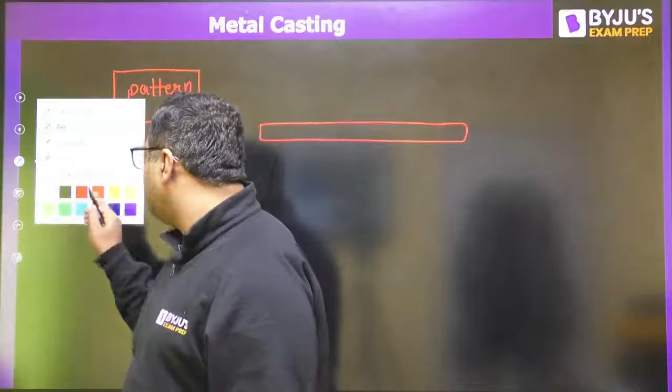So guys, first of all we would be taking a wooden board. This is the wooden board, and on this wooden board I am putting this pattern. I am putting this pattern like this, and this pattern would be there in the molding flask.

So I am also making the molding flask, and you already know molding flask is only the 4 walls, so it will look like this. Now this is the pattern, we have kept it, and this is the molding flask. As it is open from top and bottom, we can put anything inside.

So along with the pattern, now what we are going to do? Along with the pattern, we would be keeping first of all 2 ingates here and here, and the ingate is just a metallic piece. Then you would be having a cylindrical thing which is said to be sprue, then you would be putting a cylindrical riser here, and after putting all this, you would be filling up some sand.

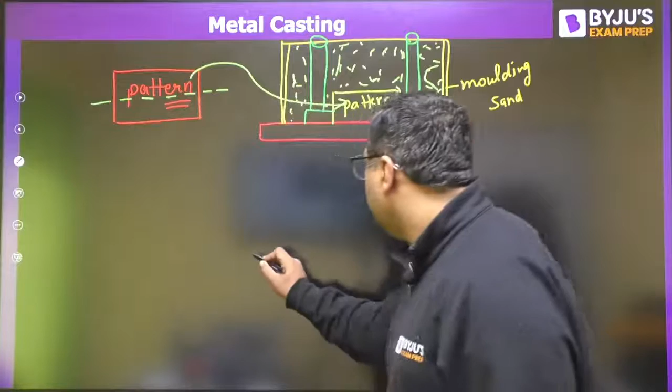So for that, what we are going to do, I am telling you that as well. You would be having once again the same wooden board. This molding flask will be taken away, and we would be putting one more molding flask, and in this molding flask we are going to have the second part of the pattern.

Now the second part of pattern would be utilized, this is the second part of the pattern. And here also you would be putting some ingates, and after that you would be filling it with the sand like previously you have done it.

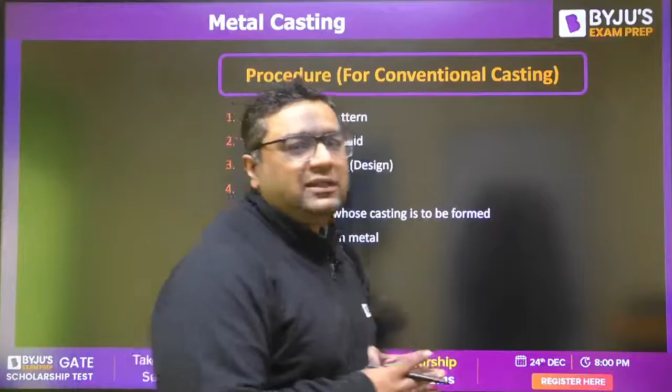Now, my dear, this entire process we are going to see technically - what are the things we are going to do. This is just a rough way I started. Now, from your syllabus point of view, things are going to start. So in general, this kind of casting process has around 10 steps.

First step is the process: first of all you need to make the pattern, because to make the product you need to make the cavity, and to make the cavity we need a pattern. So the very first step is to prepare the pattern. Once the pattern is prepared, after that you would be preparing the mold - this entire thing was the mold. So after the preparation of the pattern, you go for the mold.

Once you make the mold, then you go for the gating system, then the riser. Gating system is from where molten metal enters, and the riser tells you whether the casting is filled or not. These two steps are very important, and numericals come from here in the GATE examination. So guys, that's why they are very important.

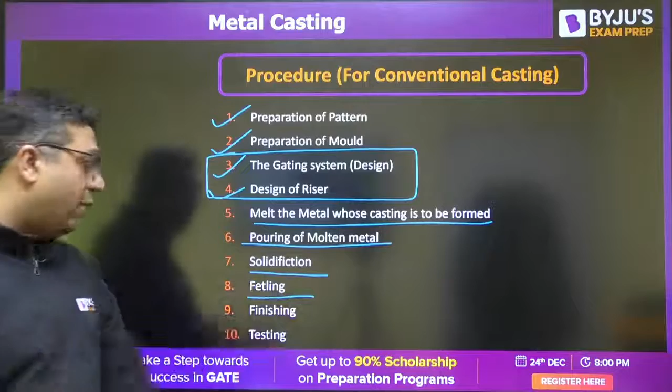Once the casting is prepared, its surface is rough, so you need to finish it, and then you will be testing whether the casting is fine or not, good or not, on all the criteria. So this is the total procedure which we are going to follow.

You have seen we used 2 parts of the pattern, so there were 2 molding flasks. The molding flask at the top is said to be the cope, and the one at bottom is said to be the drag. If sometimes the pattern is of bigger size and we need more than 2 molding flasks, then the top part is cope, bottom is drag, and the part in between is said to be the cheek. In that case we would be having 3 parts of the molding flask.

Very good, Abir. So guys, now we are starting. First of all, what is step number 1? That is preparation of pattern. So to understand the preparation of pattern, we must know what pattern actually is.

Generally, whenever I ask students what is pattern, they say the pattern is the same as the final product. I would say no, it is not same, it is similar. Actually, pattern is the replica of the final product. So if I want to make this type of product, you will see the pattern would be looking similar to that, not exactly same. So why am I saying similar? Because there would be some differentiation in size and shape.

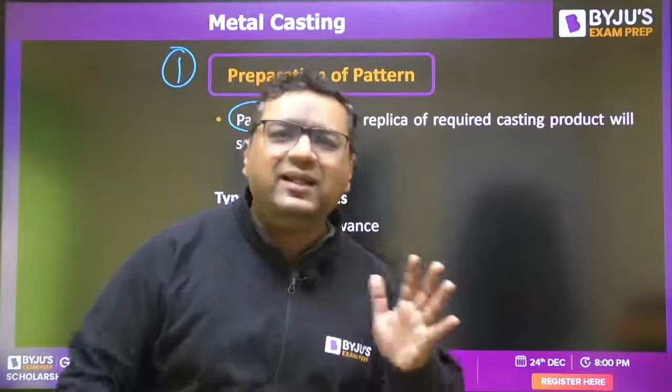Those differentiations are said to be allowances. So whenever we are making the pattern, it looks similar to the casting product, not same, because some sizes and shapes are going to be different, and that difference is very small. That is why we call it allowance.

So the very first type of allowance is said to be the shrinkage allowance. First of all, I would like to tell you why we need it, and what it is. Let us see one by one.

For that, I am showing you the cooling curve. Cooling curve is nothing but the temperature-time diagram. In this curve, we have temperature on the y-axis and time on the x-axis. This type of curve is said to be the temperature-time diagram, also called the cooling diagram or cooling curve.

Whenever you are going to melt the metal, you would be having some piece of metal in the raw solid form at room temperature. You keep this metal piece inside the furnace, and its temperature would be increasing because of heat, reaching the melting point temperature. This is said to be sensible heating.

Then, after that, you would be melting it, because at melting point temperature it will melt and convert from solid to liquid. And after that I am not stopping it. Why not? Actually, I can pour it into the cavity once it becomes liquid. Yes, you can say that. So here, whatever heating is going on is said to be the latent heat.

So if I want, I can pour this molten metal into the cavity. But in general, furnace and cavity are at a distance apart, maybe 500 meters away, or maybe 10 meters away. So when molten metal comes from the furnace to the cavity, during that time it would obviously have contact with the surroundings, and there it would be losing some amount of heat.

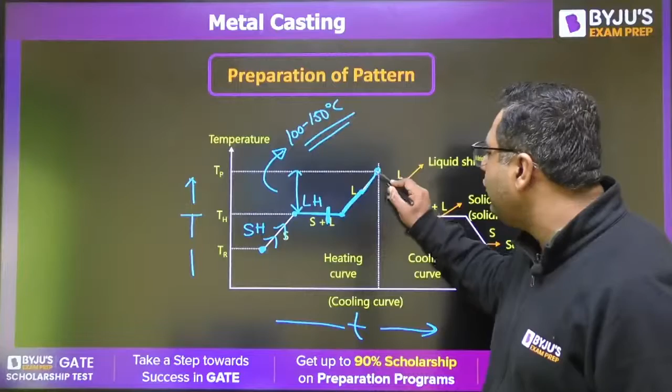So at this temperature we would be taking this molten metal and pouring it into the cavity. This temperature is said to be the pouring temperature. Now, what is going to happen in this universe? Any material, when you are talking about it, has two things.

Whenever you heat materials, they expand in size. Whenever you cool them, they contract. So heating results in expansion, and cooling results in contraction.

If you take a metal piece from room temperature to melting point temperature, it would expand progressively at each stage. So the size of that molten metal, compared to what you had initially at room temperature, would be more.

Now when you pour this molten metal, first it would cool down to the melting point temperature, because it is always in contact with the surroundings, so heat loss takes place.

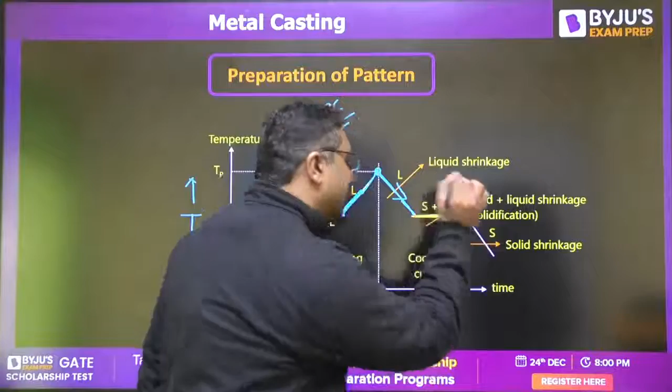After that, it would be converting to solid. Then also some shrinkage will happen. That shrinkage is also compensated by the riser.

But at this stage, the entire molten metal is converting into solid, so the riser cannot help us anymore. After that, when it goes down to room temperature, whatever shrinkage takes place during this cooling stage will not be fulfilled by the riser.

So for this part of shrinkage, we need to give some allowance. Why? Because if you have a pattern of a certain size, you fill the cavity to that size, but due to the shrinkage of this last stage, the exact size of the product would be lesser, since that shrinkage is not compensated by the riser.

So the point is, if you make a pattern of yellow size, you would get a product of blue size. And if you want the casting product to be of yellow size, you need to make the pattern slightly bigger.

So you have to make the pattern of white size. If you make a white pattern, you get a yellow product. If you make a yellow pattern, you get a blue product. That is the point, and that is Pulaki Deepak's answer.

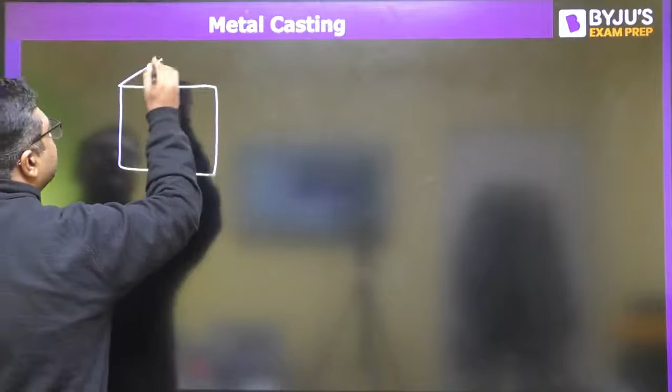Whenever these shrinkage allowances are provided, they are provided on the linear dimensions. For example, let us say I want a product of this size: 200, 150, and 100.

Let us say it is given that shrinkage allowance is 1 mm per 100 mm, which is a property of the material, showing how much it shrinks. So for that, I would make a pattern of 202 by 151.5 by 101, because after shrinkage, it would become the required size.

So this is how the shrinkage allowances are provided, my dear.

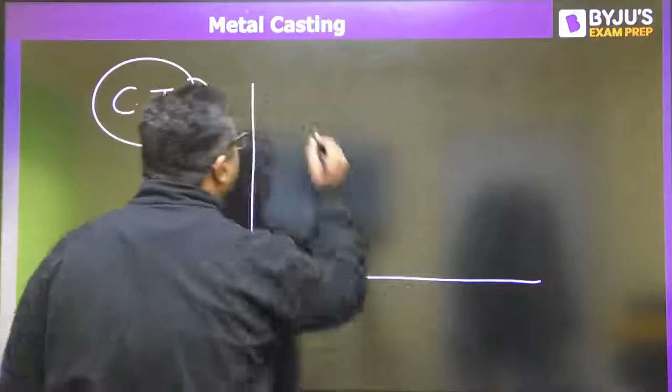When we talk about this, there is an exception related to cast iron. Many places give this wrong information, but I would like to correct it. Some people say that in cast iron, shrinkage allowance is given in the opposite direction. That is not correct - shrinkage allowance is given in the same direction for every material. Cast iron is not an exception in that way. The problem is that in cast iron, in the first stage shrinkage happens, and in the second stage expansion happens.

That expansion is the exception in cast iron - this is the solidification shrinkage stage, but it gets expanded instead of shrinking. So that expansion and the earlier shrinkage compensate for each other. That is why for grey cast iron, we need not have any riser, because the riser's work is done by these two stages. But shrinkage allowance was still provided for the third stage, since in the third stage it shows normal behavior. That is why even for cast iron, it would be treated in the same way.

The exceptional part of cast iron is that here we need not provide any riser - all other things remain the same. Is it clear for everyone? This is a point of doubt for everyone.

I have been teaching this since 2015 on YouTube. People say, sir, but everybody says cast iron has different behavior. So guys, GATE has asked this question 2 times, and every time they have treated grey cast iron similar to the other materials - you can see the 2008 and 2016 questions, both times they asked this.

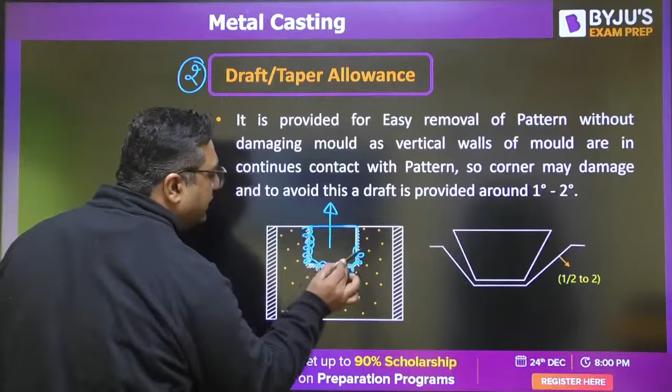If you are going to make your product or pattern like this, then what will happen when you take the pattern out from the mold? It would show some resistance from the mold walls. Because of that, friction will happen, and because of that friction, some erosion of molding sand can happen, and some part of sand may come into the cavity and make the product worse. So to avoid this, we always make the pattern at some angle.

So we provide a draft of half to 2 degrees. By doing that, once the pattern comes out even by some amount, the contact of the entire pattern would not be there with the walls - that is the benefit, so no erosion will happen in this case. That is why we provide this draft allowance. I feel everybody understood - if you have any doubt, you can ask.

We are moving to the third type of allowance, that is machining allowance. Whenever you make a casting product, its surface is found to be rough.

I feel Shubham, you have remembered all the things. Okay, so now we are talking about the machining allowance.

So when we have a pattern, when you have made the product, that product surface is not very good. Surface is going to be rough. So my dear, to make this surface finish, we are going to provide machining. You cannot use that product simply after the casting. When you will see the surface after the casting, you may be feeling you are going to get this type of surface, but in reality the surfaces are having a lot of roughnesses.

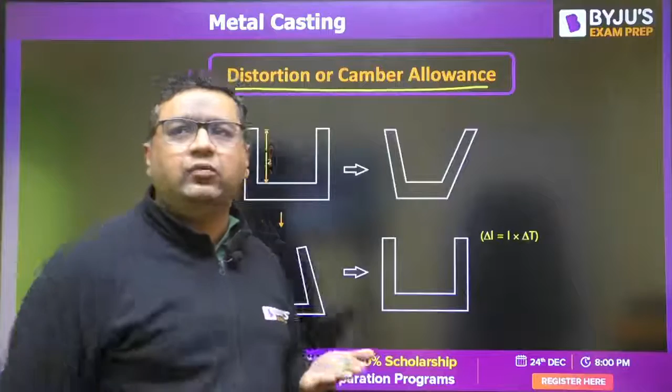Then we are going to have distortion allowance or camber allowance. So if you want to make some such kind of difficult intricate shapes, machining means we are going to machine it. Machine means removing the material. Machining means we are going to remove the extra material. So when you would be going for lathe operation, that machining will happen, material will get removed. It is a negative process, you can say. Like when we are talking about casting, here we are making it, there we are cutting it.

So when we are talking about distortion or camber allowance, if you are going to make some intricate shapes like U shapes, here this length is L1, this length is L2. You know that change of length is given as L alpha delta T. So if length is more, delta L will be more. So delta L for this side and delta L for this side is going to be different. So because of that, after solidification, it would bend like this.

But we want a straight product. So in that case, what we do, we are going to bend it in the opposite direction, so that after this solidification, it would be becoming of the same shape as we are requiring. This type of allowance is said to be distortion allowance. How much we need to do this? That would be definitely known by the person who is doing it for 10-15 years. So it would be only the matter of experience.

Okay, we are moving to the last type of allowance, that is shaking and rapping, or shake allowance. This is the last type of allowance, I feel so. So when we are talking about this allowance, whenever we are going to remove the pattern, the way to remove is, first of all, we are going to hammer it. Why we are hammering it? So that the molding sand which is stuck to the pattern, it will go away from the pattern, because we don't want to distort the shape of the cavity.

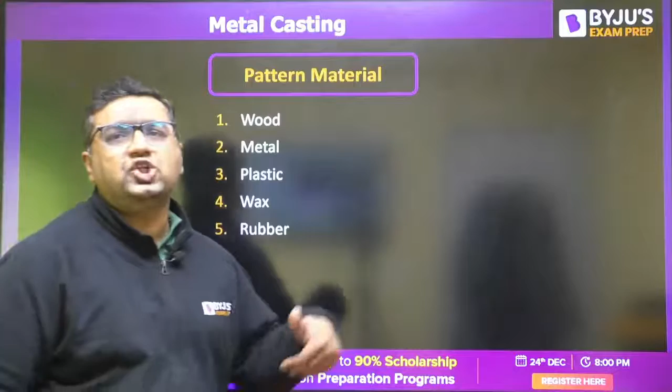Now we are moving to the material of the pattern, and with that we would be completing the first step. Then we will move to the preparation of mold. So my dear, when we are talking about the pattern material, the very first material we are going to use is wood. The best part about wood is it is easily machinable and it is light in weight. So that is why this is the most preferable material for making the pattern.

But it has some negatives also. What are the negatives of wood? It is going to get swell whenever water is getting absorbed. So definitely if it would become swell, its size and shape will change. So we never want this thing to happen. Because of that, we were in search of some better material. Second, we reach for metal. Metal is definitely not going to swell on keeping the water content. Very good, Utkarsh. So, but there are some other problems with metal.

Metal is going to corrode, so that is the problem with metal, and metal is heavy in weight. Because of that, we wanted some better material, so we reached to plastic. Plastic is light in weight, easily machinable, everything is good, but only thermal instability - when you heat the plastic, it will show change of size and shape. Because of that, we were searching for other material.

This is wax. Wax is giving you extremely better surface finishes, used for investment casting. Then we went for the rubber.

Rubber is also very light in weight, everything is good with rubber, but the problem is elasticity. If you have a pattern of rubber, due to the weight of the sand, it may get compressed, and if it gets compressed, the size of cavity will get reduced. It may get compressed like this, and after removal, it will again come back to original shape and size. So elastic deformation may result into bulging phenomena. To avoid this, we can make rubber pattern only for small and medium size castings. For large size castings, we cannot use it.

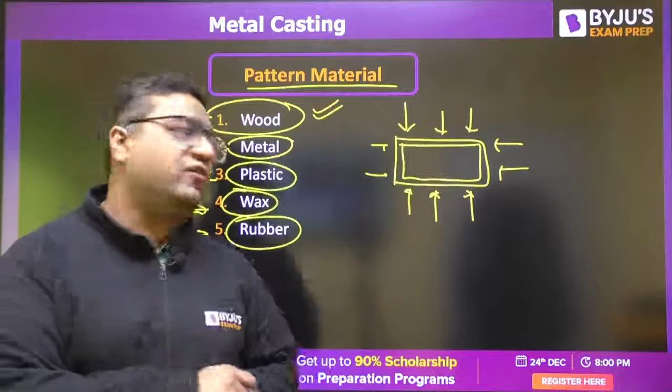Whenever we are using the wood pattern, wood is generally used for master patterns. So master patterns are generally made of wood. Whenever we are going to make a pattern of metal, that pattern of metal is made by wood first. When that is made, you provide shrinkage allowance for the first time. Then when you make the final product of whatever material you are using, second time shrinkage allowance is provided. So if you are using the master pattern of wood, shrinkage allowances are provided 2 times. That is the most important point from this slide.

I would also like to say aluminium is also used for the casting process as a pattern. It is light in weight, and definitely there is a problem of making oxide. So everywhere some good and some bad, some pros and some cons are there.

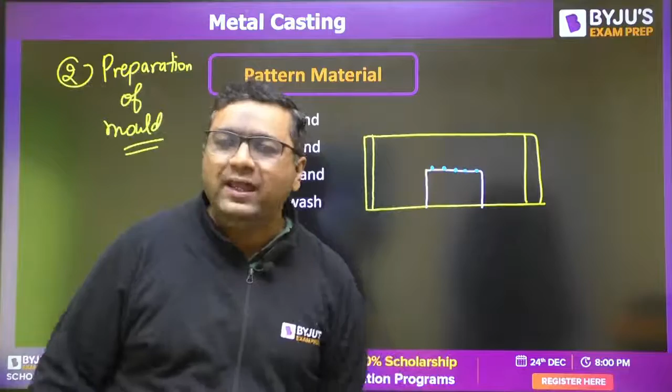It is some carbonaceous material like charcoal, like coal powder, like wooden flour - lakdi ka burada. Those kinds of material are kept onto the pattern, so that whenever the molding sand comes, there should not be any kind of sticking between the pattern and that sand, so that we can easily remove it. There is one more purpose that I will also tell you. So this is the facing sand.

So facing sand we have seen. Now backing sand is nothing but the same molding sand which we are going to use to fill the entire mold - so to fill the entire mold, this is said to be the molding sand or backing sand. This is making the back part of the pattern, and this is generally silica sand, and it would be having Na2SiO3.

Then, my dear, we are talking about the parting sand. When we have more than two molding flasks or the pattern is in multiple parts, we are going to separate them also with sand. Like this is cope, this is drag. Before joining them, we are going to put some sand, to avoid the sticking of both the molds. Okay, for that we are going...

Yes, Chandra Buleshu, this is reusable - we are using the same in all the other casting. So this is a reusable kind of thing.

Parting sand is not reusable. And mold wash is also not reusable.

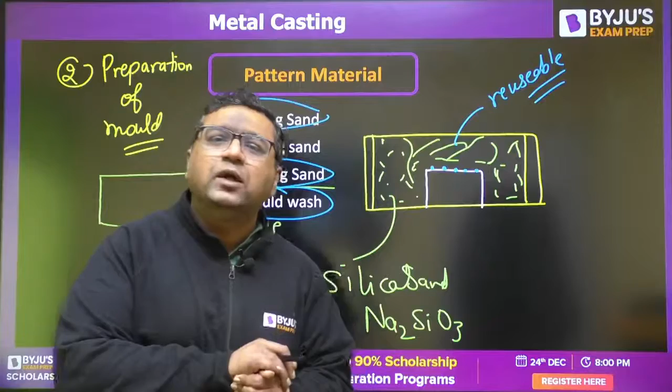So the paste is made and provided all around the cavity. Why? Because whenever molten metal enters the cavity, some gases are going to get produced. When molten metal comes, the mold wash and facing sand get converted into gases.

Why is it required to make those gases? Because if molten metal were in direct contact with the molding sand, and since molten metal shrinks in 3 stages of solidification, the molding sand would create resistance during solidification, causing cracks on the casting surface. To avoid that, we want some gap between the molten metal and the molding wall during solidification. So we provide facing sand and mold wash, which get converted into gas and provide a space between them. This property is called collapsibility.

Utkarsh, we are not talking about permeability right now, I'll tell you about that now. Those gases produced need to be taken out of the mold, otherwise they will create empty spaces in the casting, causing defects like porosity and blowholes.

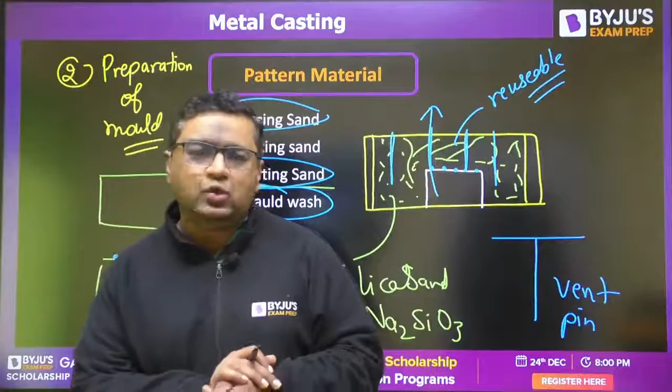So for that purpose, we provide some holes using a pin called the vent pin, which is used to make holes in the mold so gases can escape. We also try to make the molding sand porous - that property is called permeability, used to take the gases out of the mold. We'll discuss that now. So we have seen all the things related to molds.

Now we are going to see the types of molding sand.

Now we are talking about the first type of mold, the green sand mold. In green sand mold, we have 60 to 80% silica sand, 20% clay as bonding agent, 6 to 8% water, and 0 to 1% additive. Because of this water content, it is called green sand mold.

In GATE 2011, this question was asked: why is it called green sand mold, and what does green indicate? Green indicates the moisture content. This molding sand is weak because of water, so it's used for small castings because its strength is very less.

Then we talk about the second type, dry sand mold. If we take the green sand mold and put it into the furnace for 8 to 48 hours, the water content would be vaporized. When the water vaporizes, the molding sand gets pores, which help the gases escape, improving the permeability property. When you heat it from 150 to 350 degrees Celsius, and 8 to 48 hours are required in the oven, the problem is it will increase the cycle time.

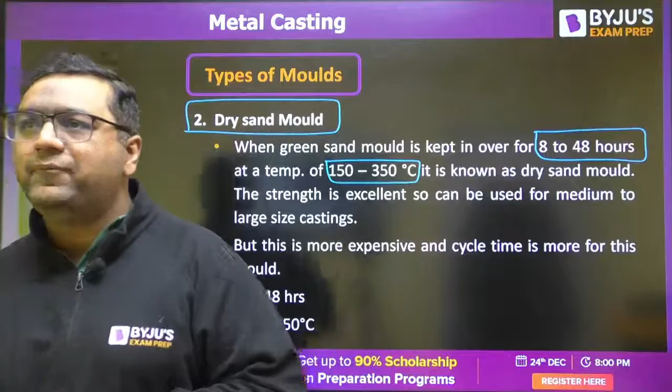Midun asks, are the compositions important? Compositions are not very important for GATE, but they come in ESE type exams.

You can remember this for one, we have already discussed it. I am not saying to remember it for ten, only for one. Otherwise it is not coming in exam. Till now there is no question on it, neither in ME nor in PI.

Now we are talking about the strength of this being more because water is getting vaporized, and that is why the name dry is coming. Because of this problem, cycle time is more, and heating cost is more. So it is expensive as well as time taking, guys.

Next we are moving to the third, loam sand mold. It is used only for grey cast iron. As you know, grey cast iron has a different kind of behavior, it does not require any riser. For loam sand mold, we use 50% silica sand and 50% silt clay.

Next is CO2 molding. If you want to make your mold very hard, you already know your silica sand has Na2SiO3. We react it with CO2 by passing CO2 from this mold. When you pass CO2 from this mold, it gets converted into Na2CO3, which is found to be a very hard material, so the hardness of the mold increases.

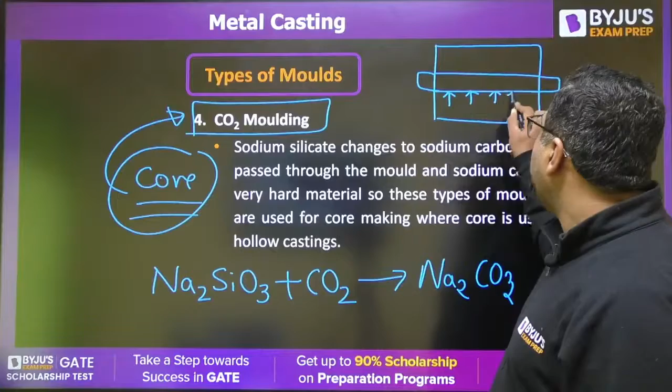If this is the cavity we have, you would have a core because you want a hollow casting. So the core would be like this, and molten metal would be applying some buoyancy forces, and because of that force there are chances of breakage of this core. So for that purpose we make this of more strength and more hardness, using the CO2 molding process.

Very good, Utkarsh, bahut hi badhiya. So this is CO2 molding. Now we are coming to the properties of molding sand.

The first property is permeability. As I already told you, whatever facing sand mold wash you are applying is going to get converted into the form of gas. Now to take that gas out from the mold, it must have some kind of pores, because from those pores the gas would come out very easily. So the property of taking out gases in the lesser possible time is said to be permeability. This is a desirable property because if the gases remain inside, they would produce some defect in the castings, like porosity, like blowholes.

Very good, Utkarsh. That also we will talk about in the later section when I tell you about the design of core.

Whenever we see permeability, it is found to be a function of the water content. It is found to be maximum at 8% water content. I also explained why it is so, but that 'why' is not much required for the GATE paper, because that is required for the interview part. In GATE nobody will ask you that.

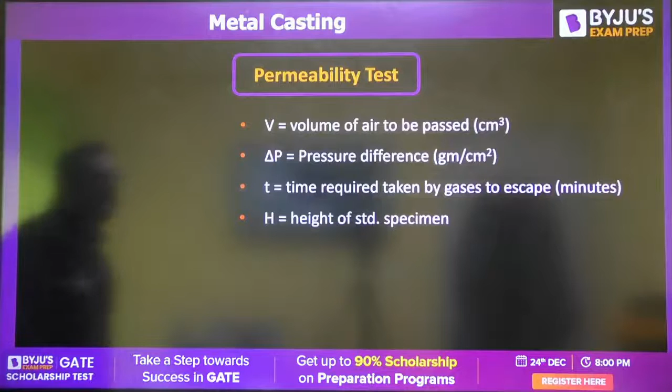I also told you there is something known as permeability number. There is a test performed because permeability is a desirable property, and if permeability is lesser, casting would be defective. For that there is a test performed: we take a test specimen, making a cylindrical mould from the same moulding sand material. For that cylindrical mould, the diameter for a standard test is considered to be 5.08 centimeter, and height is also 5.08 centimeter. There is a pressure difference between these two ends, and we provide some volume of air.

And when some volume of air is allowed to pass, we note down the time taken by that air to pass through with this pressure difference. Then we define a permeability number as volume of gas into height of specimen, divided by pressure difference into area into time. This is said to be the permeability number, and if permeability number is more, permeability will be more. This is the first place where a numerical will come.

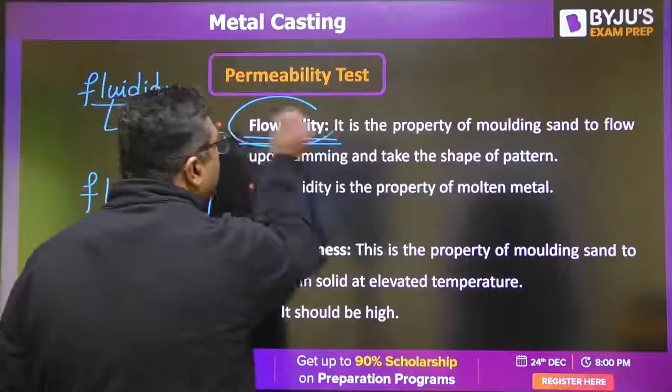Flowability is the property of moulding sand. You may be saying, sir, moulding sand is not liquid, and we have studied that only liquid and gas are generally flowable. So my dear, molding sand, whenever you are putting it on the pattern, it needs to take the shape of the pattern. For that purpose, we need to take a wooden hammer and hammer it. When hammering, that molding sand must flow over the pattern, then only it would be able to take the shape of it. That property is said to be flowability, and to improve this property, we may be requiring some additives.

Okay, next property is refractoriness. You already know that molding sand is going to be subjected to a very high temperature of molten metal. So my dear, to withstand that temperature and remain in the solid form, that property is said to be refractoriness. It should be high for the molding sand.

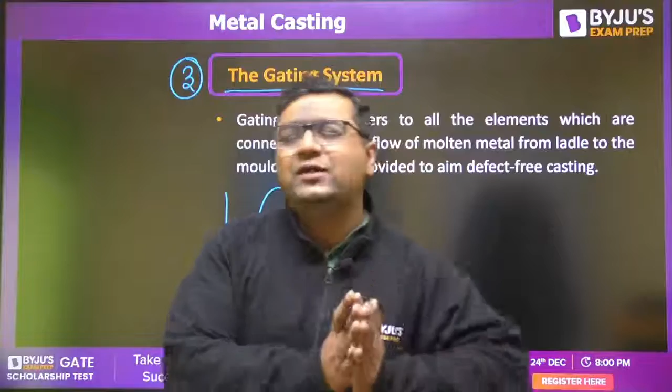Okay, so now we are talking about the gating system. The gating system is the meaning of all those elements which are related to the flow of molten metal from the ladle to the cavity. All those elements responsible for the flow of molten metal from ladle to cavity are said to be part of the gating system.

But the point is, what should be an ideal gating system? What should be the characteristics of a gating system? The gating system must have the possibility that it must not provide any kind of outside impurity. It must have only that molten metal for which the casting is to be produced.

We want the molten metal to enter without any turbulence, otherwise it would result in some defect. We want molten metal to enter the cavity in the minimum possible time. If the time taken is more, it may solidify in between, and then once again you would have some kind of defective casting.

We don't want any kind of dross formation, foam should not form. So all these are the responsibility of a good gating system. For that we need a wide variety of elements in the gating system. I am making a rough figure of that gating system, what it looks like.

Okay, so you can see this, this is how it looks. Let me make it again. Okay, so you would be having it like this.

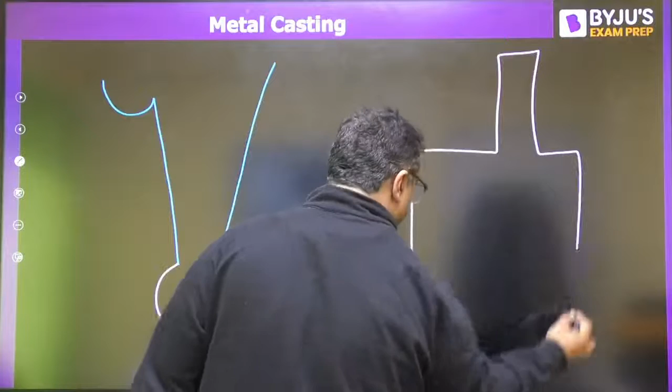So here we will not be talking about cavity and riser, we will see those afterward. Right now we are talking about the gating system. The gating system is everything from this ladle - molten metal is coming from the ladle - so from this ladle to this entry point, everything covered is under the gating system. Is it clear?

Great, that's what I am saying, because scientific study says listening helps you remember faster than reading. That is scientific study.

So my dear, this part is said to be the pouring basin. This is made such that molten metal should not directly enter from here, otherwise when molten metal comes from that much height, there are definitely chances of vortex motion, and also because of that much momentum, we may have some kind of dross formation.

So to avoid this, we pour the molten metal here, and after filling the pouring basin, molten metal will go slowly. To reduce its momentum in the path, we have one strainer. That strainer has two purposes: one is to reduce the momentum of the molten metal, and the second is that if any foreign element is there, it would absorb that as well.

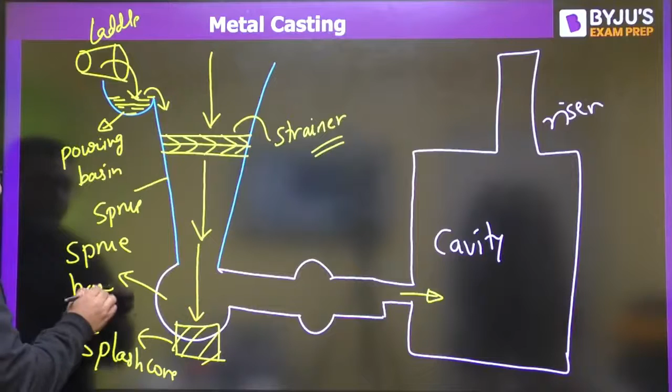So it is said to be sprue base well. Once molten metal is entering here, we will allow the molten metal to go like this. This thing is said to be the skim bob, provided once again for the impurity, for the smaller impurities. It would be having heavy impurity inside and lighter impurity inside, and rest molten metal will be entering.

Then once again, this is said to be the ingate, because this is the gate for the molten metal to enter into the cavity. So guys, this is something said to be the gating system. You can see all these components: pouring basin, sprue, strainer, sprue base well, splash core, skim bob, and this is said to be runner. All these, including ingate, are parts of the gating system.

After that, cavity will come. Right now when we are talking about this part, this is not arbitrarily made, this is particularly designed. You can also ask, sir, why is this made up of taper? Why not cylindrical? That also comes by design. That's why I am saying we are not making it arbitrarily. It is properly designed, otherwise we will be having defective casting.

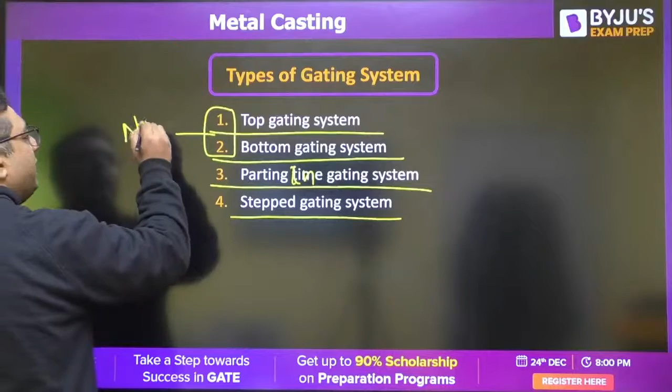These two are important from the numerical point of view, and the rest two would be coming for the application point of view majorly. So let us see first of all the top and bottom gating system. This is a very rough diagram for a top gating system.

But what is the definition of top gating system? If molten metal is entering from the top, you can see at the top of the cavity molten metal is coming, so we will call it top gating system. What are the advantages of this gating system? First of all, when molten metal is coming from the top, it would be filling like this.

Let us say there is a time at which this much cavity is filled. You already know the first layer was this one. So if the first layer is going to solidify, because it came first, it may solidify first, it is not going to affect the other upcoming molten metal. So I will say temperature gradients are favorable, because solidification happened from bottom to top.

So it would not be affecting the molten metal coming inside the cavity. Temperature gradients are favorable, but as you know, it is coming from top, the chances of dross formation are more. You must have seen the street man selling milk going like this from the top to make the jhag, to make the dross. So here chances of dross are more, but temperature gradients are going to be favorable.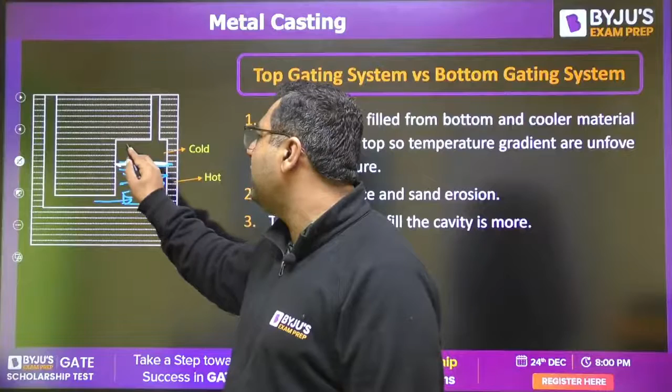Then, if we see the bottom gating system, this is the rough diagram for bottom gating system. Molten metal is entering from here. When it is entering from here, the first layer, let us say up to this molten metal is filled, you already know this would be the first layer. And if it is solidified, the rest part would remain unfilled. So that is why I will call it a non-favorable temperature gradient.

So my dear, here temperature gradients are unfavorable, and time required to fill the cavity is also more. But the advantage is there is no turbulence, so there is no dross formation. So these are all the pros and cons we have discussed.

Okay, so now if we are going for the derivation of top gating system, you can see this is the height of pouring basin. This is the rough diagram to understand. This is the height of sprue. This is the cavity having area A and height H.

So my dear, you know that when the molten metal would be coming here, it would be coming with a velocity, and that velocity is said to be velocity at ingate. It is coming out to be 2gHm. Hm is the height of molten metal, and Hm is given as H1 plus H2. So my dear, there is an area of ingate, that is Ag.

So if I want to find out the time required to fill the cavity, you know the volume of cavity equals the volume flow rate from the ingate into the time required to fill. So you would be getting time required to fill by the top gating system. It would come out to be A into H divided by Ag into 2gHm. Okay, so if out of H1 and H2 one term is missing, you can skip that. This is from where the second numerical will come.

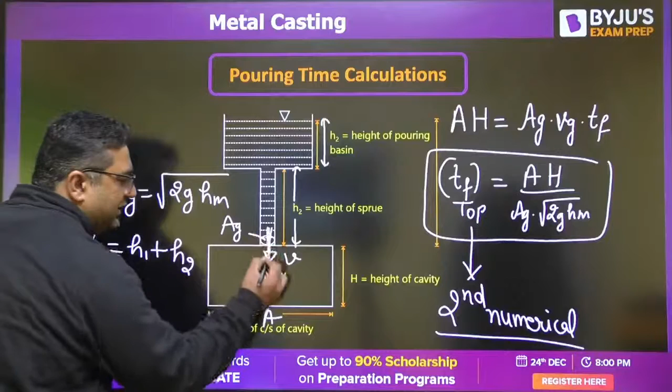You have already seen that the first numerical will be coming from permeability number. The second numerical would be coming from this. They can also ask you about the velocity by which it is entering, so for that, 2gHm would be the formula. This is for the top gating system, guys.

So my dear, the point is whenever we are going for this, this was the diagram. Okay, this is point number 1, this is point number 2, this is point number 3.

So my dear, whenever we are going to apply the Bernoulli equation at point 2 and 3, we are saying that this is point number 2, this is point number 3. Point number 3 is obviously open to the atmosphere, so at point number 3, pressure will be... okay, something is coming. Ag is minimum area - dear, I cannot say Ag is minimum area, that will depend on the gating ratio. Okay, take G in mm, definitely that you need to take in the same units. This is not an empirical relation.

Utkarsh, very good. Bilkul, but this is the revision session, so those kind of things I'm not telling you here. Units and all will be helpful in the practice session, I feel. Okay, so if you want, I can tell you that also. So I would tell you, when you are putting Vg as 2gHm, mind it, whenever you are putting the value of Hm, if everything is in centimeters, if H is in centimeters, G should also be in centimeters. If that is in mm, G should also be in mm. So always take care of that unit, otherwise you will make a mistake.

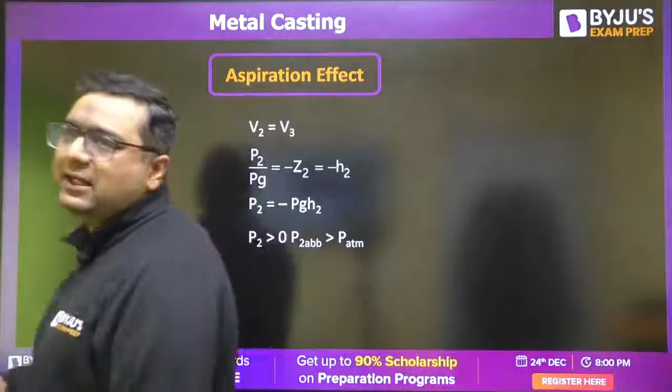Then you would be getting P2 to be minus rho g H2, which means negative pressure. So it is saying that pressure at 2, gauge pressure is negative, which means pressure at 2 absolute is less than the atmospheric pressure. So if at 2 pressure is less than atmospheric pressure, it will result into what? If pressure is less than atmospheric pressure, air from outside will enter into the cavity, creating defective casting. So entering of air because of pressure at 2 being less than atmospheric is said to be the air aspiration effect, and my dear, we strictly need to avoid it.

So if we want to avoid it, we need to keep the pressure at 2 to be minimum. Minimum pressure at 2 should be the atmospheric pressure. So considering that, once again we will apply the Bernoulli equation: P2 by rho g plus V2 square by 2g plus Z2 is equals to P3 by rho g plus V3 square by 2g plus Z3. You know Z3 is 0 because of datum.

We are saying this to avoid entering of air inside, because we cannot afford that. This is not about pressurized and non-pressurized gating systems. I am talking about this air aspiration effect, which is the entry of air because of pressure getting lesser than the atmospheric pressure. So we have to avoid it simply.

Then, you know that Z3 is going to be 0. And if P3 is atmospheric pressure, P2 and P3 gauge pressure would be 0. So when they are 0, we are left with the equation V2 square by 2g, V3 square by 2g. Now V2 cannot be equals to V3. If V2 were equals to V3, then what would Z2 mean? There is no meaning, so V2 cannot be equals to V3.

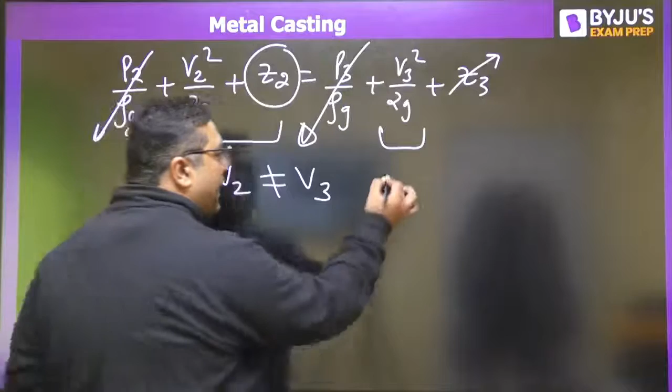And if that is the case, by the continuity equation, A2 cannot be equals to A3. It means the area needs to be changed. So now we will find out what kind of area change should be there. You will find that the ratio of area at 3 to area at 2 comes out to be the square root of H1 by Hm.

Is it clear whatever I have written, or shall I do the derivation? Let us see how many of you remember: is it H1 by Hm or H2 by Hm? Amir, Utkarsh, Malaysh is saying sir, H2 by Hm. So will it be H2 by Hm?

Now what you need to do is apply the formula V2 square by 2g plus Z2 is equals to V3 square by 2g. You know V3 is nothing but root 2g Hm. Putting that value, squared and divided by 2g, you get Hm. So V2 square is equals to 2g times Hm minus Z2. Hm minus Z2 is H1, so you get 2g H1.

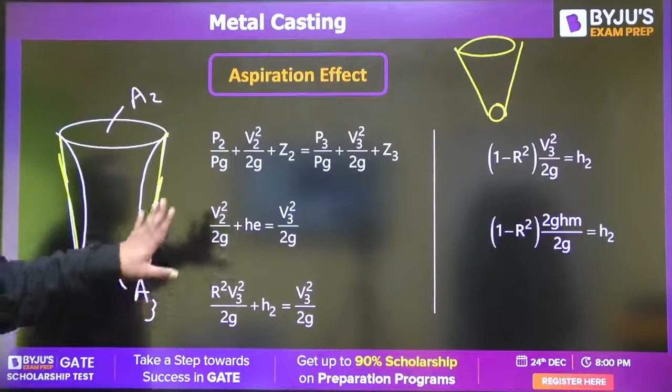So you can see area at 3 and 2 are not equal, but they depend on a square root, meaning the variation of A2 to A3 will be parabolic. If this is A2, this is A3, the variation should be like a parabola. But for simplicity, we make it taper only, and that is why the sprue is shown as tapered. That is the reason to avoid the air aspiration effect, like Utkarsh was saying, we make this kind of taper.

Definitely it is confusing, but I feel it is clear to everyone now. So moving to the time required for the bottom gating system: if you have this bottom gating system, this is H1, this is H2.

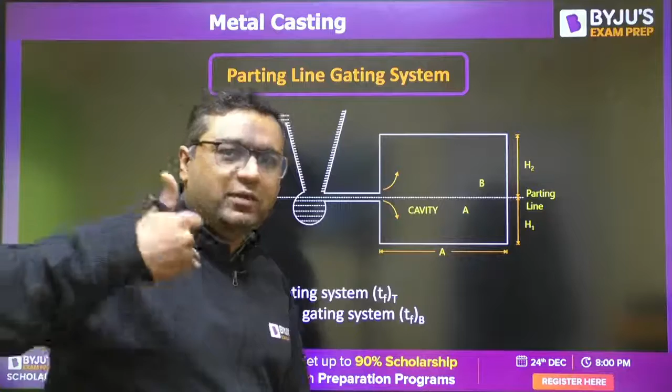So this we have already seen for top and bottom gating systems. This is the parting line gating system - thanks Abhishek. This parting line gating system is the combination of top and bottom gating system. So my dear, if we have a cavity where one part is filled by molten metal coming from the top and one part is filled by molten metal coming from the bottom, we call it a parting line gating system.

If you want to find the time required to fill this cavity by parting line gating system, you use the formula for top gating system for part A, and the formula for bottom gating system for part B. So time required to fill the cavity will be time required to fill A plus time required to fill B - A uses top gating system, B uses bottom gating system.

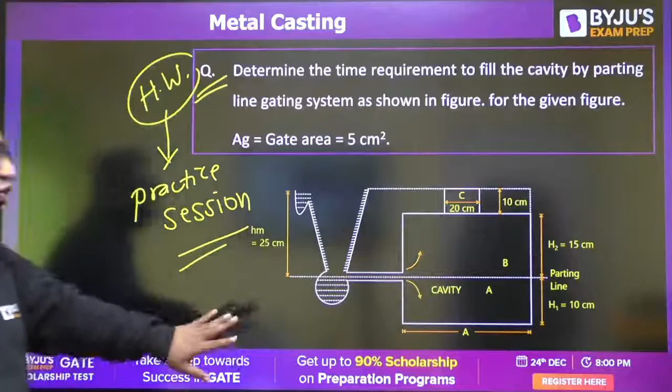So I feel we have completed all the types of gating systems. Now we are talking about choke area. This question was asked in GATE 2014: what is choke area? Many students had it wrong at that time. They were thinking the ingate area is the choke area, or some thought the sprue area is the choke area. But choke area is the minimum cross-sectional area present in the gating system.

In the gating system, we normally talk about three areas. When we have a gating system like this, after that the cavity comes. So here three areas are very important: one is the area of sprue, second is the area of runner, third is the area of ingate. Out of these three areas, whichever is minimum, that is said to be the choke area.

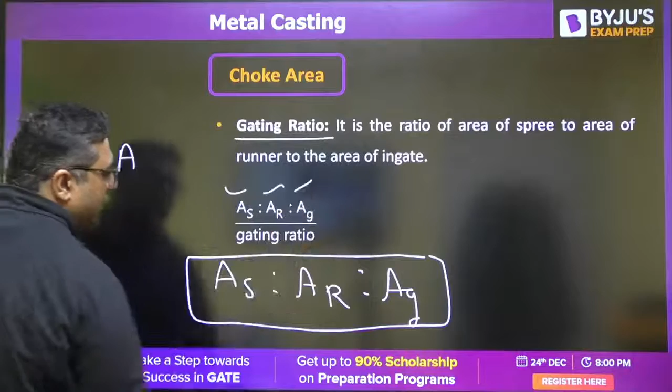If that is the case, we have already defined all these things, and now we need something known as the gating ratio. The ratio of area of sprue to area of runner to area of ingate is called the gating ratio. If you already know the gating ratio, you can calculate the choke area, since the choke area is one of these three. So if you get one of these three, with this ratio you can find out the others. This is how we can calculate all the dimensions of a gating system if questions give you the gating ratio and other details required to find the choke area.

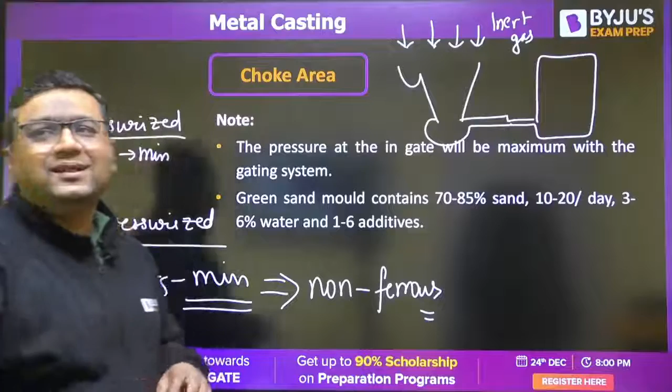So guys, now we will see about the riser design.

We have completed step number 3. Now we are reaching step number 4, which is the riser design. Riser design is also very, very important, and riser has a very important function to perform.

Riser is going to provide the molten metal in the first 2 stages of shrinkage. You already have seen this cavity, now I would be showing you only the riser majorly. Let me make a better diagram that will give you a better picture.

You are having this diagram, like this. This is the cavity. You know, whenever solidification happens, shrinkage will be there. Then the riser is going to provide the molten metal for the first 2 stages of shrinkages.

Riser has majorly 2 functions. One function of riser is to provide the molten metal during the first 2 stages of shrinkages.

The second function of riser is that by looking at the riser level, we can tell whether the casting is full or not. If the riser level is completely filled, it means casting is also completely filled. So to see whether casting is filled or not, we need to see the level of riser.

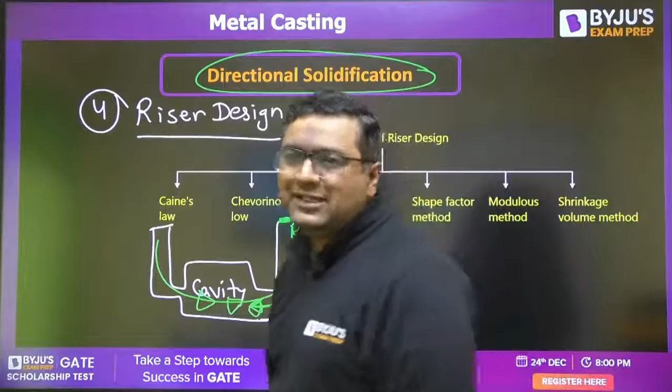But the riser will be able to provide molten metal in the first 2 stages of shrinkages only if it solidifies last, that's why it is called directional solidification. We want solidification to happen in a particular direction, so that the riser solidifies last. It means the part of casting near the riser should solidify last. That is the meaning of directional solidification.

So for riser design, there are various methods. The first method is Caine's law. Second is Chvorinov law. Third is Caine's method, shape factor method, modulus method, and shrinkage volume method.

Now let us see all the methods one by one. When we talk about Caine's law, what did Caine say? Caine said there is a term known as cooling characteristic, and cooling characteristic is directly proportional to surface area by volume.

Obviously, if one surface area is more, then for the same volume, the one with more surface area would have more cooling, faster cooling, and less solidification time. So more surface area means more loss of heat. Caine's law says cooling characteristic is directly proportional to surface area by volume.

I would also define a term modulus. Modulus is defined as volume by surface area. Modulus is 1 by cooling characteristic. Modulus is sometimes given in the question also, so you must be aware of this term: modulus is volume by surface area.

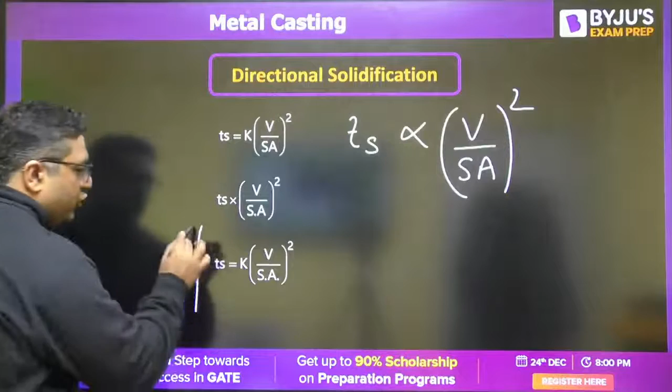The second and most important is Chvorinov law, from which numericals are coming. Chvorinov law directly gives the formula for solidification time. It says solidification time is directly proportional to volume by surface area squared, which is modulus squared. So the formula is solidification time equals K times (volume by surface area) squared.

Here K is called the solidification constant, and K is found to be a function of freezing temperature, melting temperature, conductivity, etc. There are many factors on which this solidification constant depends. For two similar materials for which the casting is prepared, the solidification constant remains the same. This is the formula, and many questions are there on this K regarding which factors it depends on.

Now, Caine's method is not important for GATE. When we talk about Caine's method, it gives us a curve between y and x. This curve is called the Caine's curve. Let's see, if you make this y and x, what is y and what is x?

X is said to be the freezing ratio, defined as the modulus of riser to the modulus of casting. Y is defined as the volume ratio, volume of riser to the volume of casting.

So this curve is an experimental curve which is made from experiments, and this curve shows the relation between y and x. When we are talking about this relation, let us say for this curve we have this point. For this point, this is the value of y, this is the value of x. So from some relation given between y and x, you find out that both terms have the dimension of riser.

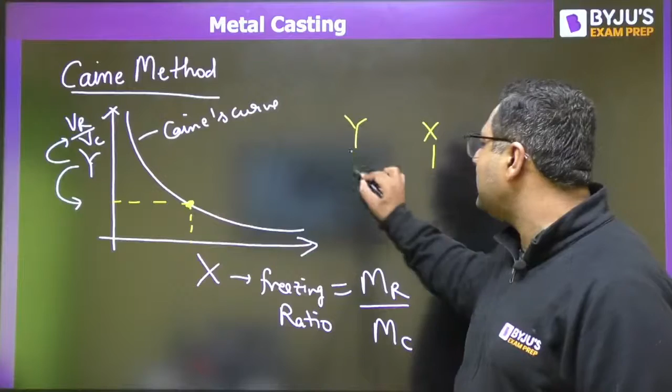So as this is the method to find the dimension of riser, y is the volume of riser over volume of casting, and this is modulus of riser over modulus of casting. Since modulus of casting and volume of casting are known to us, because the casting's dimension is known, but the riser's dimension is not known, because that is what we are designing for, the problem is this would not be a normal analytical method. Here we need to use this curve and apply hit and trial to get the answer, and that is why this is not required for GATE. You can leave this method. For ESE conventional, it has been asked only once till now.

So it is not required for GATE, I am just telling you because our other method is an improvement of that. What is the other method? It is the shape factor method. In this method, they have kept on the y-axis the same ratio, volume of riser over volume of casting. On the x-axis they have replaced the freezing ratio with the shape factor. Now, this shape factor does not depend on the riser size, it depends only on the casting size. This method is also known as the Naval Research Laboratory method. This curve comes similar to the Caine's curve, so this is a modification over the Caine's method. Caine's method will not come in the exam, but this would definitely come in the exam.

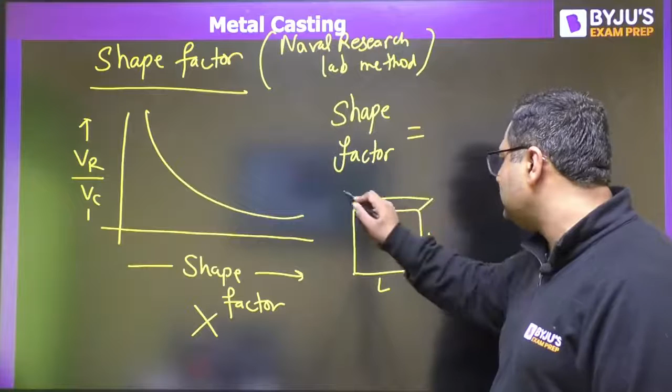Let's continue. So guys, now when we talk about the shape factor, it is defined based on the size of the casting. If we have a plate with length L, width B, and thickness T, then the shape factor is L plus B divided by T. This is the shape factor which comes from the size of the casting. So if you have the size of the casting, you can find out the shape factor.

And you would be given a table where they specify the volume ratio against the shape factor. So you would have values like this: shape factor 2, 4, 6, 8, 10, and corresponding values like 0.2, 0.4, 0.5, 0.7, and so on. Once you find the shape factor value, using this table you get the ratio of volume of riser to volume of casting. Now, volume of riser you need to find, and volume of casting you already know, so that is how you can find the volume of riser.

This method is called the shape factor method. So you just need to remember the formula of shape factor. This is for the plate. For the sphere, the shape factor is d plus d divided by d, which equals 2. For the cylinder, it is d plus h divided by d. So this is the shape factor of cylinder, and this is the shape factor of sphere. You would only get these three shapes, so you can remember the shape factor formula. This is how the shape factor method is used.

Okay, I feel you got it. And now I am talking about the shrinkage volume method. Now the shrinkage volume method.

If you want to apply this method, you need to check two conditions: one is the necessary condition, the other is the sufficient condition. First of all, you would be given that the volume of riser is 3 times to 4 times the volume of shrinkage. That 3 or 4 would be given in the question; if not given, you can consider 3 times. That is the necessary condition. For the sufficient condition, you need to check that the modulus of riser should be more than or equal to the modulus of casting.

If, using this formula, you are getting the radius of the riser to be 7 centimeters, and putting this 7 centimeters satisfies the condition, then your answer would be 7 centimeters. But if on applying this condition we get R equal to 9 centimeters, then the answer will be 9 centimeters. So the answer will be the maximum of these two. If this says 7 and this says less, or 7 is satisfied, 7 will be the answer. If this says 7 and this says 9, the answer would be 9. This is how you need to apply it.

Moving further, guys, now we are moving to the last topic, the type of riser. Do you know what are the two types of riser? The first type of riser is the top riser, and the second type is the side riser. Do you remember when we use top riser and side riser, what are the relations of radius and height?

Yes, top riser is like this - here I will not be showing the gating system. This is the top riser, and this is the side riser. Do you remember when you would be using this? For the top riser, volume of riser is pi by 4 d square h, and surface area of riser would be pi by 4 d square plus pi dh. For the side riser, volume is the same, pi by 4 d square h, but surface area is 2 times pi by 4 d square plus pi dh.

So when you minimize the surface area, you would be getting height equals to radius. Is it fine or not? If you want, we can go for the derivation, but this is not required at this level. When you are preparing for GATE, when you are revising for GATE, we need not go for the derivation, because in revision you require only formulas. These derivations are not required at least. Please tell me, then we are moving further.

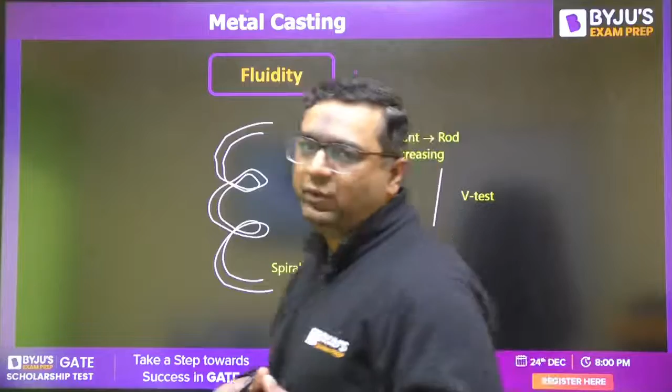Other students, Manas, are you there or not? Okay, Naveen, is it clear? If anybody wants any derivation, you can tell me, but it is not required at this level, because when we are revising the things, we just need to see the formulas. That is the meaning of revision only. If we go for formula derivation, it would be very lengthy. But if any derivation is important from which a question comes, I will surely do that.

Now we are moving to the next step, my dear. The next step after riser design is melt the metal. Melt the metal.

So my dear, now we would be taking the metal to the furnace and it would be melting, and you would be getting the molten metal. Step 6 is the pouring of molten metal.

When pouring the metal, we pour it at the pouring temperature, which is the melting point temperature plus 100 to 150 degrees Celsius. This is called the degree of superheat. So pouring temperature needs to be more than the melting point temperature.

The reason for that is to maintain the fluidity of the molten metal. If the molten metal starts to solidify, its fluidity will be affected. So fluidity is a property of the molten metal.

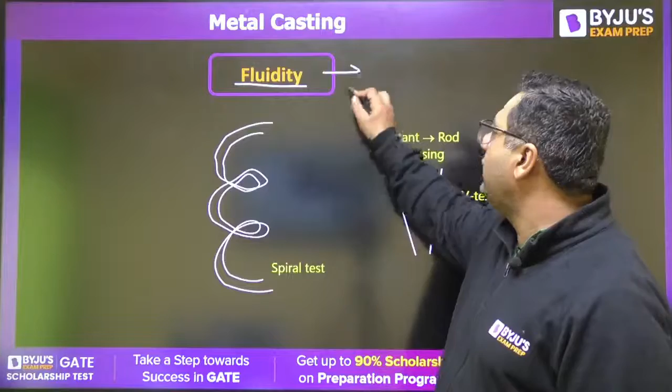Just like we have a test for permeability, we have a test for fluidity too, called the spiral test. For this, we have a spiral shaped cavity, and we allow the molten metal at pouring temperature to enter into this spiral cavity.

As the molten metal goes inside, because of heat dissipation to the surroundings, its temperature decreases, and after some length it solidifies and stops moving further. The length covered by the molten metal before solidification is the indication of fluidity - more the length covered, more the fluidity of the molten metal. This is how we define this test for fluidity.

If this cavity has a constant size, we call it the rod test. If its diameter decreases throughout, we call it the V test. These are the tests performed to check the fluidity - the ability of molten metal to flow and fill the cavity before solidification starts.

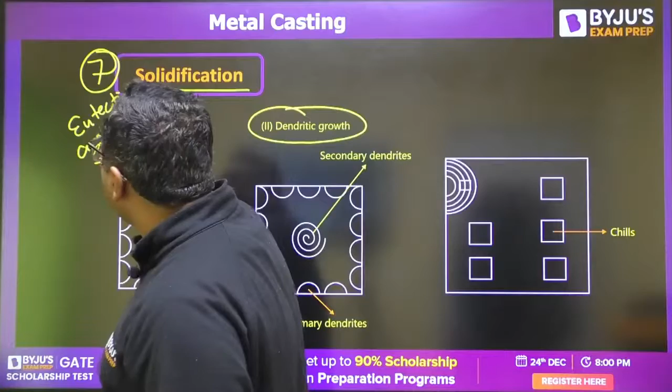Skin forming type of solidification happens in pure metals, or materials having eutectic composition. Everybody who has studied material science would understand eutectic composition. Definitely, from a non-conventional background, theory questions will come, so we have to cover that.

So in skin forming, what happens? Take an example - if you have a bowl with water and you put it in the refrigerator to solidify it, and then if electricity goes, you will find that in between water is still there, but from the sides solidification has happened. So similarly, this is the top view of the molding wall.

Molding walls are cooled while the molten metal is hot, so the solidification front starts from the molding walls and progresses inward from all the molding walls like that. Because of this, you end up having a cavity at the center. So here you can provide the riser to fulfill this cavity. This type of solidification is called skin forming.

It is the perfect one. Here no defects are coming because of the riser positioning.

Second is dendritic growth. This randomly growing solidification front is also said to be the dendrite. So from sideways, always the dendrites are moving. But if this molten metal is having a mushy zone, meaning where some solid and liquid take place,

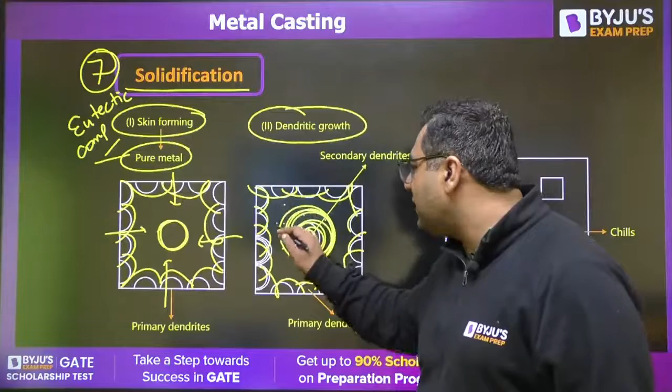Because of shrinkage, it is going to happen. And if they are coming more than in one number, we cannot provide that much number of risers. That is why for such cases, we would be having some kind of defects.

So for that purpose, we are going to provide the chills. We would be providing some metallic pieces, chills, which would not allow the secondary dendrites to form.

They will make the primary dendrite form at the center faster, because when you would be providing a chill here,

primary dendrite would be coming from here also, and before secondary starts to form, they will cover the entire structure. So by providing these metallic pieces in between, you can stop the formation of secondary dendrites.

Kenil sir, will you cover metal forming? Dear, I want to cover every topic, but for that you need to be present in the sessions. Because if you would be coming, then only I will come to cover that. So your interest should be there.

Like in casting, you have responded well. We would be having welding. If the same response continues, we will go for metal forming. Same response, we will go for cutting. So it depends on your response.

If your interest will reduce, then my session will reduce. If your interest will increase, my session will increase. It totally depends on you. Okay, if you are ready, we are always ready to give you.

Sure, okay, let's move further. So we have seen skin forming and we have seen dendritic growth. So everybody understood the function of chills? Please tell me, everybody understood the function of chills? Chills, fine.

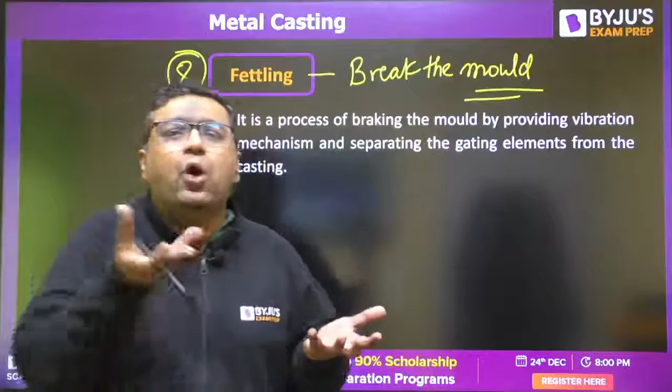For that, sometimes to break the mold, we use a vibration mechanism. So because of that vibration, the mold would be broken, because now we need our product to come out from that mold. So the mold should be broken, and that process is said to be fettling.

Next is one part of this, sandblasting. Like whenever you are breaking the mold, still some sand particles are there on the surface of the casting. Let us say you have a cylindrical casting, and on this some sand particles are still there.

So for that, what we are going to do is take some steel balls of 2 to 5 mm. We put those steel balls onto the surface of the casting at high velocity, and because of that those sand particles get removed. This process is said to be sandblasting.

Then surface finish is done on the casting product. For that we go for machining. It is the same machining for which we have given the machining allowances. Okay, that is what we are going to provide.

Then after that we would have the 10th step, that is inspection or testing. So to test the already made casting product, we have various ways. The first way is the coining technique. This is, you can say, not a very scientific technical method.

You would be having a coin of 2 rupees, 5 rupees. You would be knocking onto the casting. If it sounds the same throughout, it means the casting is good. If it sounds different at different parts, it means some defects are there.

Okay, second is you can pass ultrasonic and X-rays. If the pattern comes the same throughout, your product is fine. If patterns come differently at different locations, it means some defects like porosity and blowholes may be there.

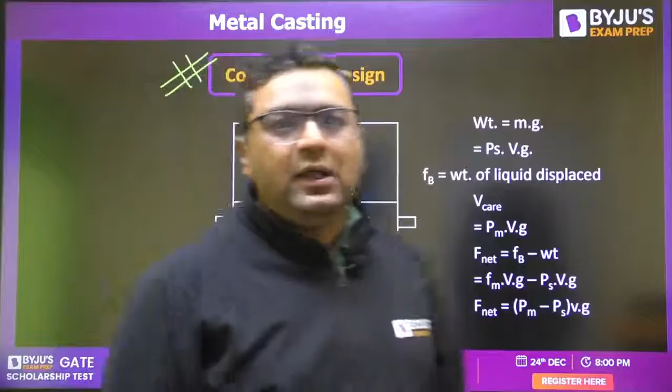So this is how the complete work is done. Now we are going for the core design. Within 5 minutes we are going to enter non-conventional casting, and by 1:15 or 1:20 I will complete it.

So I asked you to complete casting in 2.5 hours. I am going to complete it before 10 minutes.

Okay, so we are going for core and core design. You already know cores are used for hollow casting. So let's say you want this kind of circular hole in this casting. For that, this core is placed there. The seat of the core is said to be the core print. So if this is the core, this is said to be the core print.

Now, the weight of the core would be acting downward and buoyancy force would be acting upward. The weight of the core is m into g, that is, density of core times volume of core into g. And buoyancy force would be density of molten metal times volume of core into g.

This is the weight of the volume displaced, so volume displaced will be equal to the core volume, but the density would be of molten metal. Buoyancy force acts upward, mg acts downward, and molten metal's density would be more. So the net force would be rho molten minus rho core, into volume of core, into g. That force acts upward.

Okay guys, so this is the core and its design, we are completing that. One more thing I would like to tell you about is paddings. Like if we have this as the casting product, at the corners we will be providing... okay guys, just wait.

Yes guys, fine. So guys, this is said to be the paddings. So we are going to provide the padding—sorry for the inconvenience. When we talk about paddings, these are provided at the corners because at corners the casting generally has weaknesses. To avoid that, we provide paddings because non-uniform cooling happens there. So to avoid those things, we provide them to support the corners.

Midun, actually to find the area of the chaplet requires some data books. That kind of question will not be there in GATE because data book parts are not given, but there are some empirical relations in the formula notes. You can remember it if you want—it would be totally your choice.

Okay guys, moving to non-conventional casting now, the last part of the chapter. In non-conventional casting, we need to remember the process and the application. Questions would be there from the application.

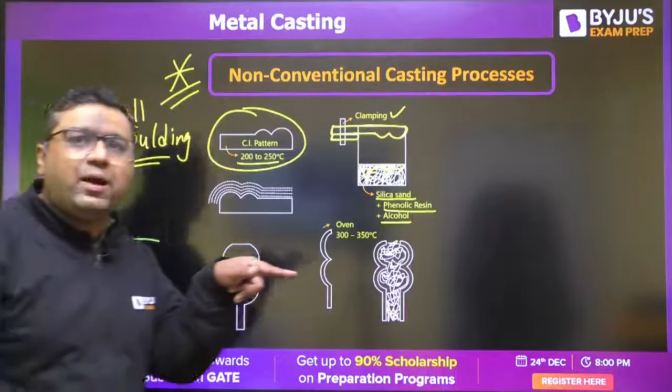So we are going to have this cast iron pattern. First, we would be heating it to a temperature of 200 to 250 degrees Celsius. After heating this pattern, you would place it onto a container with proper clamping arrangement, containing sand mixtures: silica sand, phenolic resin, and alcohol. Alcohol is provided for localized heating, silica sand you know, and phenolic resin is for proper bonding. Now we will be inverting this box. When you invert this box, you would get some layer of this mixture onto it.

The more time you provide, the more layers would be made. After that, you would take this pattern out, and on this pattern you would have some thickness based on the time of contact of this pattern with the sand, giving you the desired thickness of this shell.

Now we can take this shell away, and after taking it away, we would keep it into the oven to increase its strength. Such 2 to 3 shells would then be joined to make the cavity, and into that cavity you will pour the molten metal to make the final product.

In the oven it is heated to 300 to 350 degrees Celsius. The patterns are heated from 200 to 250 degrees Celsius. So this process is called shell molding.

This is the first type of non-conventional process. It is used to make symmetrical circular shapes, like IC engine cylinder heads. So you may ask, what do we need to remember here? You need to remember this application: IC engine cylinder heads are made by the shell molding process.

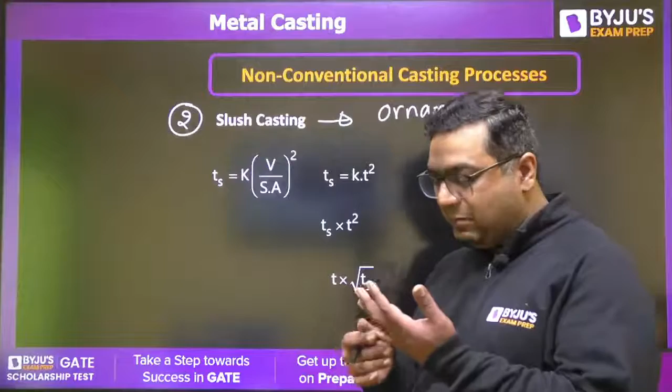Slush casting is used for ornaments, statues, and toys. You might have seen serials like Surya Putra Karn, Mahabharat, and Ramayana, where the kings were wearing very heavy ornaments and jewelry on their bodies.

So when you want those jewelries made, how are they manufactured? This is how slush casting is done. Let's say you want to make a kundal of Surya Putra Karna, with that shape. You would make a cavity of this size.

Now this would be having the cavity. You would be pouring the gold into that cavity. At that time, gold was not having that much value. When the gold is poured, solidification starts from the wall.

Once you get the desired solidification thickness, you would invert it back, the rest of the gold would flow out, and you would get your product - this is the kundal of Suryaputra, and that is how ornaments are made.

Likewise, hollow statues can be made - hollow statues of various people from the past, like statues of different political members. All these things are made by slush casting.

Since you are not allowing complete solidification, this process is also known as partial solidification. For that partial solidification, we need to find the time. The time required for solidification is K times volume by surface area squared.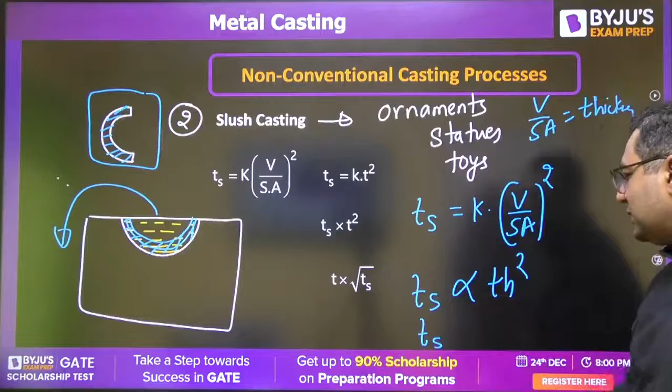For thin geometries, volume by surface area is given as the thickness. So solidification time is directly proportional to thickness squared, meaning thickness is directly proportional to the square root of solidification time. So you can write the equation: thickness equals C1 times square root of solidification time plus C2. This is the relation between thickness and solidification time.

From this, lamp shades are also made. Till now there has been no question from this, but I am sure you would get a question surely this year or next year from this topic.

They would ask you: for 10 mm of thickness, the solidification time is, say, 5 seconds; for 8 mm of thickness it is 4 seconds. Then for 15 mm of thickness, what would be the solidification time? Using these two data points, you would find the values of C1 and C2, then putting these values in, you will find the solidification time. This type of numerical you can practice in the practice session.

I will take this numerical. So guys, this is how things are going to be done. Slush casting is completed, now we are going for investment casting. You already know investment casting is very important, and it is also known as the lost wax technique.

Here's what we are going to do. First we make a pattern of wax. Actually it is not made by sand molding technique, it is made by centrifugal casting, which we will discuss after this. Generally this type of pattern is made by centrifugal casting.

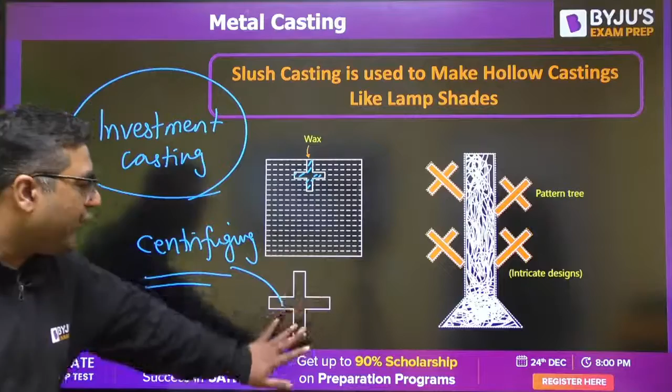So you would be having this kind of wax pattern made by centrifugal casting. Then you would be making multiple patterns to attach to this shape, which is called the pattern tree, because it is in the shape of a tree, with the wax patterns applied onto the walls of it.

Now we would take this pattern tree and put it into this slurry, which contains silica plus ethyl silicate plus water. You would be giving it multiple dips so that a layer of slurry forms onto the pattern tree, like this.

This slurry is a jelly kind of thing whose melting point temperature is much more than that of wax. Now you will heat it. After heating, all the wax will melt out, and after that you would be pouring molten metal into the cavity, and then you will separate them and get the products.

So all the medical instruments which require more surface finish, like turbine kind of things, we are going to make using this investment casting.

Remember this slurry which contains silica sand, ethyl silicate and water. And remember the applications: the major applications are gas turbine blades, jet engine parts, and surgical parts or medical instruments.

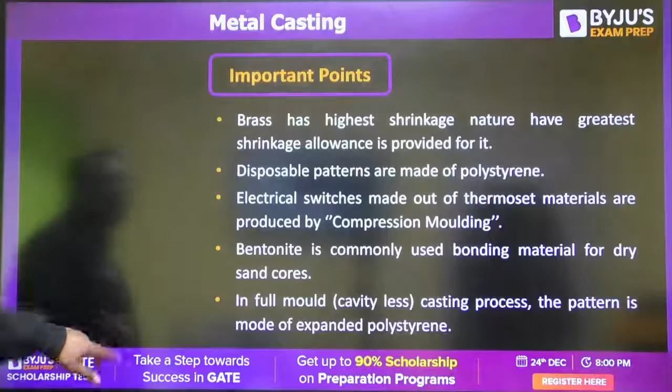Will the material be only wax? Generally wax is used, sometimes mercury is also used, but mainly wax is there, which is why it is also called the lost wax technique, because at the end we are losing the wax. So guys, next we move to the next technique, that is full molding technique.

As the name suggests, this time we are going to make not only the pattern but the full mold with the gating system and the riser. So you would be having some material like thermocol.

Using the thermocol material, you would make this type of pattern, which would have not only the cavity part but also the gating system, riser and the cavity. You would make this of either thermocol or some kind of plastic or polymer, such material which has a low vaporization temperature.

You would keep this pattern like this, and after this you are making the cavity. For that you would be putting sand all around it.

Then you would be putting the molten metal into this. As this is not empty space, this was the thermocol - it may be plaster of Paris also.

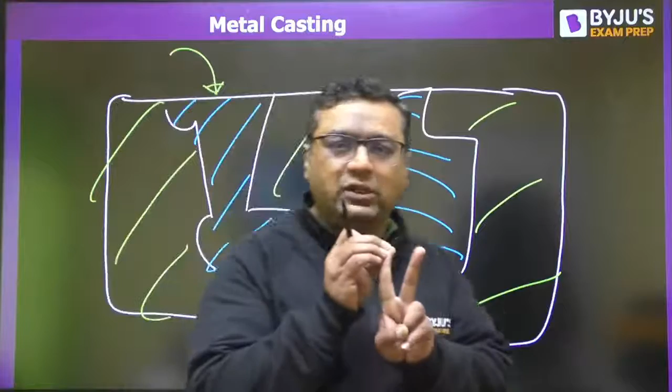They are very difficult shapes to produce. So that is why we are using such kind of things to provide the gating system and riser in between the pattern only. So the application for this is majorly motor casing and tool casing. That is what you need to use.

If you are using thermocol, it's fine. If you are using plaster of Paris, it is also said to be plaster molding. So the name also changed with that.

So next process is centrifugal casting, the most important one. Last to last year, I told that a numerical would be coming on this. You can see the Super 20 series of last to last year. I said this type of question was not there on YouTube before. You will see it, that was there in the exam exactly, only the data was changed.

So in centrifugal casting, you would be having a cylindrical cavity in two parts, like this. We can add or join them with clamps. So we are going to have a cylindrical cavity. Why I am saying in two parts? It means it is split bush type. One is this, other half is this. They are joined with clampings like that. So we have this cylindrical cavity.

This cylindrical cavity is kept at a very small angle, maybe 2 to 3 degrees, very less angle. And we would be starting this rotating at a very high speed, 8000 rpm, 9000 rpm.

Sir, if I know some basics and follow the marathon session of all subjects, dear, if you have the idea, then definitely I can say more than 50 you can achieve. But for that, as you are saying, you know some basics plus PYQs are required. If you are going for the classes plus PYQ, you can easily score 50 marks. But for that, it should not be mugging up, it should be understanding of the things.

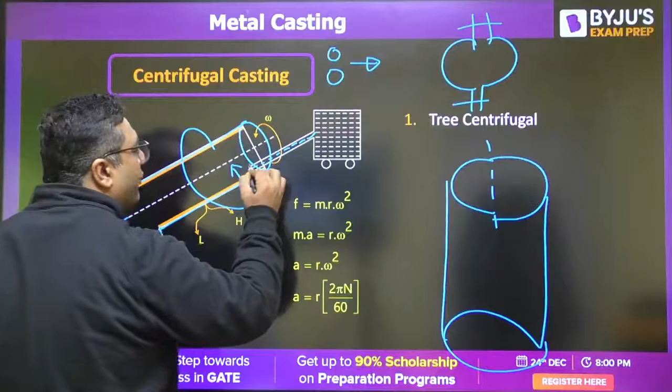So when you are going to rotate it with very high speed, now you would start the entry of molten metal from here. When molten metal comes, because of this high speed of rotation, molten metal would be taking the shape all around the periphery. Because of centrifugal force, it would be going away from the center. And when it goes throughout, obviously the thickness would be increasing.

Once you get the desired thickness, as you are making hollow pipes, you are making jointless pipe, seamless pipe, with some thickness, and they don't have any joint. So when you get the desired thickness, you will stop the flow of molten metal.

During the rotation, solidification will also happen. Heavier impurity will go outside, lighter impurity will come inside. So with machining, you can remove the impurity after the casting process is over. And once the solidification is over, you will stop the rotation, take the product out, and open the cavity.

This is said to be true centrifugal casting because you have given very less angle. You are not using any gravity force to fill it up completely. That is why it is said to be true centrifugal casting.

So in centrifugal casting, there is a force, centrifugal force, m*r*omega square. The m's will get cancelled out, so acceleration will be r*omega square.

This question was already there in the exam 2 years back. In the practice session, I will be taking numericals on all these things, so don't miss the numerical session of this also. So the application of this is making hollow cylindrical pipes, large size bush, and propeller shaft. This is the application of true centrifugal casting.

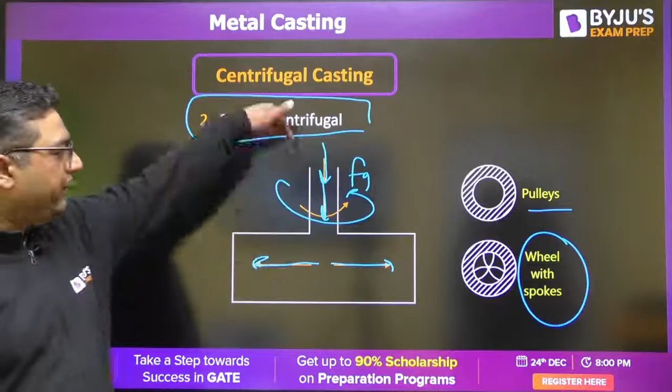Then we have semi-centrifugal casting. In semi-centrifugal casting, molten metal comes inside with the help of gravity force. Then also it is rotating, so molten metal is going away at the periphery with centrifugal force. So this type of casting is said to be semi-centrifugal casting. It is used to make pulleys, flywheels, or wheels with spokes. This is semi-centrifugal because it also uses the gravity force.

I already answered this, Javed, because it is using the gravity force also. Now we have already seen the application. Now I am talking about the centrifuging technique.

If you see the centrifuging, this is the top view. Molten metal is coming from the top with the gravity force. After that, it is going inside the cavities with the centrifugal force as it is rotating. And these are the small products, large in number.

Like we were making the pattern of wax, or wax pattern of investment casting, such small patterns are placed at all the peripheries, and with the rotation molten metal will fill it. After solidification you will separate your product, and this type of casting is said to be centrifuging.

With this you are going to make the pattern of investment casting. You can also make more number of small products, or some symmetrical or unsymmetrical products can be made. Seamless tube centrifugal casting, yes exactly.

Seamless pipes are made by true centrifugal casting. That I already told, I feel you missed that point. You must be tired now, it's been 2 hours. That is why. So now we are talking about die casting.

When we are talking about die casting, actually there are 2 types of pipes. One is seamless pipe, meaning jointless pipe. So they are made by centrifugal casting, and other pipes which have a joint are made by the welding process, high frequency resistance welding. Okay, fine.

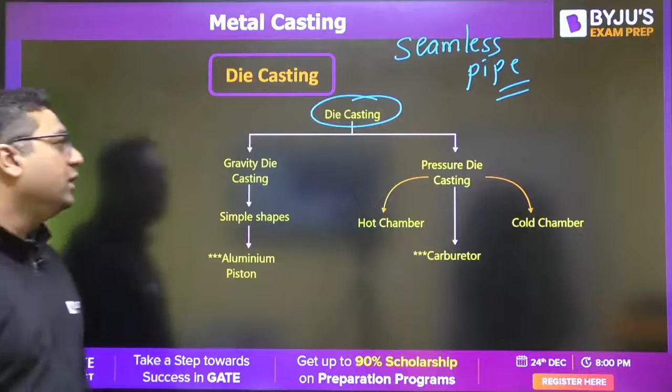So die casting will be having some permanent molds. Here the molds are not breakable, they are permanent, made up of metals. It is of two types, gravity and pressure die casting.

In gravity die casting, you can make simple shapes. We are getting the help of gravity force only to fill the cavity. Aluminium piston is the product made by this. Pressure die casting would be used for complex shapes like carburetor, because it uses some pressure forces, external forces, to fill the cavity, so any shape can be filled up. So that is why it is done in two ways.

One is hot chamber, other is cold chamber. Let us see what that is.

For gravity die casting, you are going to make an aluminium piston kind of thing. These are two parts of the die - this die is the fixed die, this die is the movable die. You would be pouring the molten metal inside.

After solidification, this movable die would be taken away, otherwise you cannot take the product out. Then there is some ejector rod, that ejector rod would be pushing the product, and you would be getting the product out, which is of this shape. So simple shapes can be made by this.

And to fill it you are using the gravity force, that is the reason we are calling it gravity die casting. Then we are having pressure die casting.

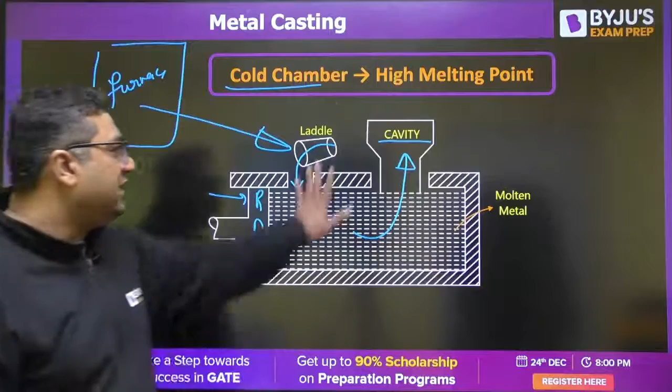Whatever shape you want, you can produce from this because external pressure is used to fill the cavity. Otherwise, due to gravity, sometimes the casting remains unfilled. Like if we have this type of shapes, then casting may remain unfilled. So to avoid that kind of thing, we are using external pressure.

Cold chamber casting is used for high melting point cases, because whenever we are using hot chamber, in hot chamber the furnace is part of the cavity, so it is used for low melting point temperatures.

Otherwise, this entire setup would have to be of very good material which can withstand very high temperature. So keeping that into mind, for low melting point temperature we are using hot chamber, for high melting point temperature we are using cold chamber. Hot chamber means furnace and cavity are one thing only - they are not separate.

And we have already seen with pressure die casting, we are going to make products like carburetors, which are having complex shapes.

In the cold chamber, there are chances of contamination because throughout when molten metal is coming, it is in contact with the air. But in a hot chamber, we will get a high quality product as there are no chances of contamination. Is it clear?

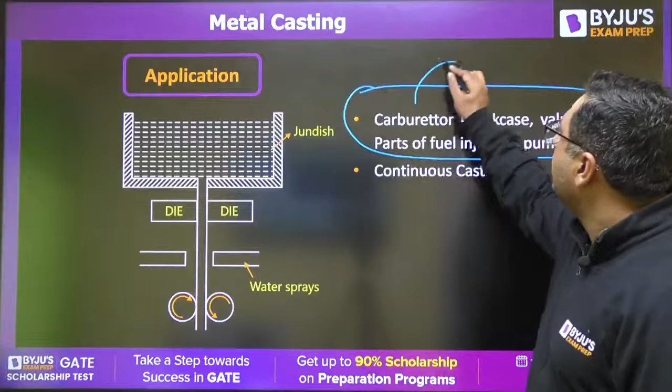So we have seen this hot and cold chamber. Now the last type we are talking about, these are the applications of pressure die casting. Last is continuous casting.

Continuous casting: this is a bowl called tundish, and we have molten metal going like this. When molten metal is coming like this, these are the dies. With the die, when the molten metal is coming, it will get solidified, and we get a shape with the help of the die. With that shape, this product comes out.

We also have a spray of water for better cooling purpose, and then rollers are provided to maintain the shape, whatever shape it is coming with. So tundish is a bowl with a small hole. This is a simple process of making the propeller shaft, using it to make the shaft. So this is said to be the continuous casting process.

Okay guys, with this we have completed the entire casting. Now there are two things: one is the casting defect, and then I will be going into the welding defect. As welding is a small chapter, it will be completed in 1.5 hours, so to make it 2 hours, we will cover both defects along with the welding topic.

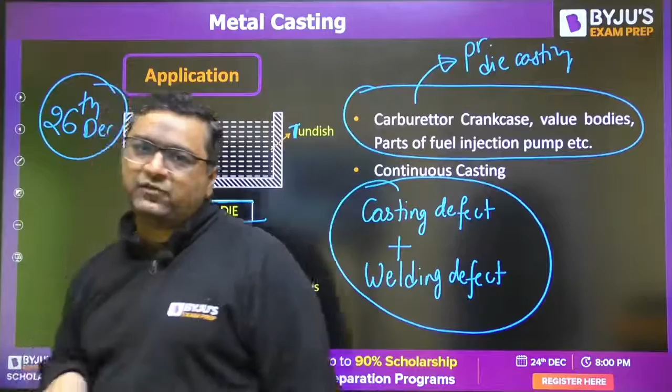Sure Amin, sure. Arjun, very good. So guys, with this we have completed casting today, and tomorrow casting defect, welding defect, plus riser positioning. As today I don't have the diagram of riser positioning, so with the diagram I would be telling you that also. So these three things we will see with the welding now. So we would be meeting once again on Monday for the welding part.